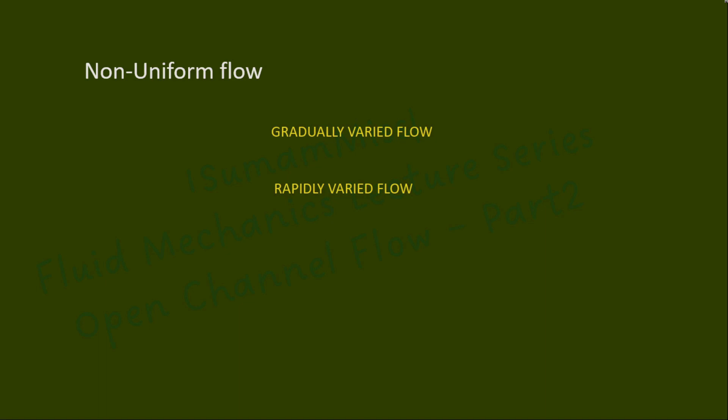Today we are continuing the discussion on non-uniform flow. Non-uniform flow is classified into gradually varied flow and rapidly varied flow. In gradually varied flow, flow characteristics, that is flow depth and velocity, change gradually over a long distance. In rapidly varied flow, these flow characteristics, that is flow depth and velocity, change suddenly over a short stretch of the channel. One example of rapidly varied flow is the hydraulic jump.

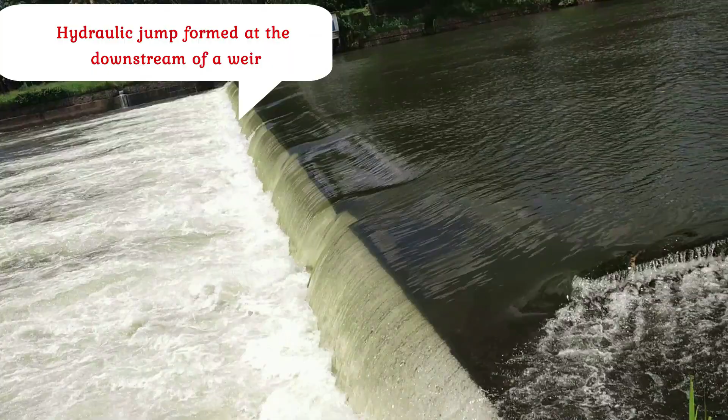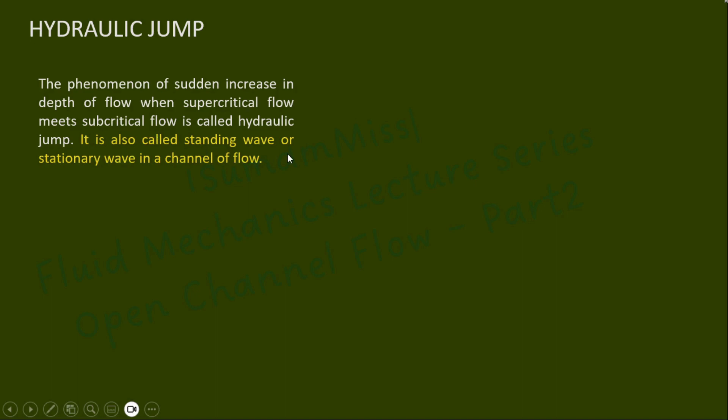The phenomenon of sudden increase in the depth of the flow due to the transition of the flow from supercritical to subcritical is called hydraulic jump. It is also called a standing wave or stationary wave in a channel flow. The hydraulic jump is formed at a section where a low depth stream of high velocity strikes sufficient depth of liquid flowing with low velocity. So the incoming flow is in supercritical state, whereas it strikes the subcritical state of flow, and the hydraulic jump forms at this meeting point.

When the hydraulic jump occurs in a flow, the depth of flow increases suddenly and the flow experiences a considerable energy loss due to eddy formation and turbulence. Since the depth of flow in a hydraulic jump suddenly changes, the phenomenon can be categorized as rapidly varied non-uniform flow. Since the non-uniformity is limited to a short distance, the hydraulic jump represents a local phenomenon.

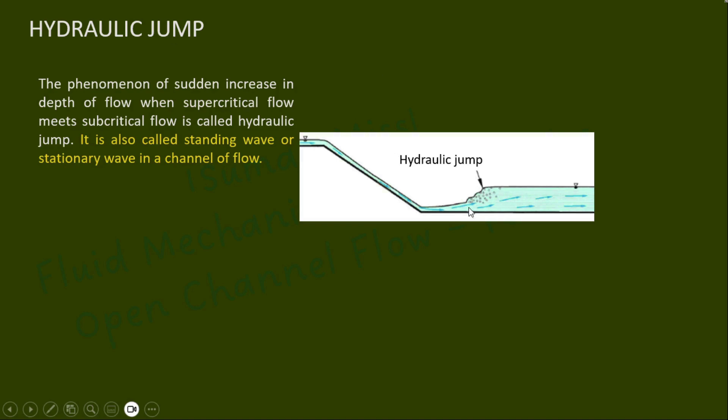The hydraulic jump also forms when the liquid flows out from a spillway. In this case, the idea of creating the jump is to dissipate the large amount of energy that is carried by this water. Otherwise, it will scour the entire downstream structure. Another situation where the hydraulic jump occurs is downstream of the sluice, from which water comes out with a depth less than the critical depth.

This dotted line represents the critical depth line, and the flow depth of this incoming flow is less than the critical depth. That means the flow here is in supercritical stage and it meets the subcritical flow at the downstream side, and the hydraulic jump is formed at this location. So the apparent effect of hydraulic jump is the increasing water level.

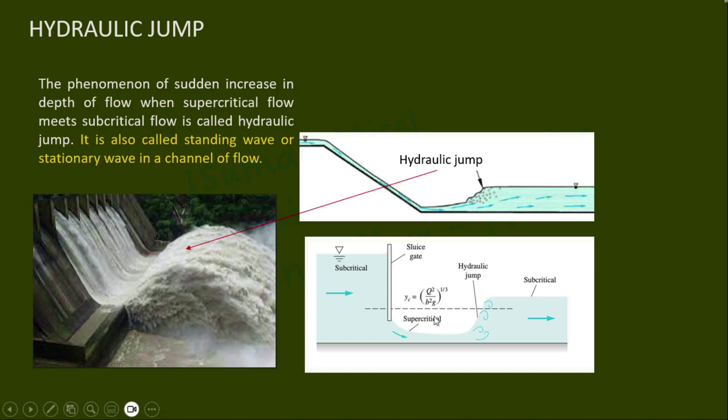Now let us discuss the energy loss associated with the formation of the hydraulic jump. Consider the formation of the hydraulic jump in a prismatic channel with a horizontal bed. When the hydraulic jump occurs in a channel, the flow depth increases suddenly and the flow experiences considerable energy loss with eddy formation and turbulence. Y1 and V1 are the flow depth and velocity just before the jump, and Y2 and V2 are the flow depth and velocity after the jump.

If we draw a specific energy curve, the minimum point corresponds to the critical depth Yc. Y1 is the flow depth before the jump and the corresponding specific energy is equal to E1, and Y2 is the flow depth after the hydraulic jump and the corresponding specific energy is equal to E2. So you can see that E2 is less than E1, and delta E is equal to E1 minus E2. Because of this energy loss, the depth after the jump is less than the alternate depth corresponding to the specific energy at section 1.

Because of this unaccountable energy loss, one cannot use the energy concept for the analysis of rapidly varied flow. We have learned previously that in a rapidly varied flow, we have to use the specific force curve with the concept that the specific force at section 1 equals the specific force at section 2, that is equal to F. If we draw the vertical at F, it will cut two points on the specific force curve corresponding to the flow depths Y1 and Y2. These Y1 and Y2 are the flow depths before and after the jump. These two depths are called sequent or conjugate depths.

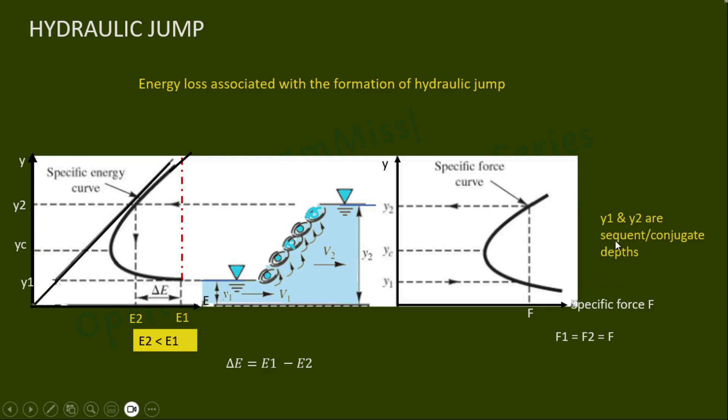Now we can derive the expression for the sequent depth in a hydraulic jump in a horizontal rectangular channel. Consider a hydraulic jump that forms in a prismatic channel of width B with a horizontal floor carrying a discharge Q. Based on the momentum concept, we can say the specific force at section 1, that is F1, is equal to the specific force at section 2, that is F1 equals F2. So what is specific force F1?

F1 equal to Q square by gA1 plus A1 Z1 bar, and F2 that is equal to Q square by gA2 plus A2 Z2 bar. So here A1 is equal to B into Y1 and A2 is equal to B into Y2, and Z1 bar is the distance of the point of application of this pressure force with respect to the free surface, and Z2 bar is the distance from the free surface to the point of application of the pressure force P2. So Z1 bar equal to Y1 by 2 and Z2 bar equal to Y2 by 2.

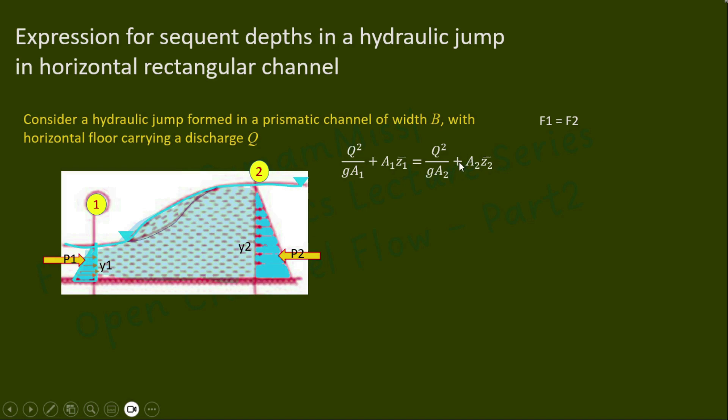So if you are substituting for A1 and A2 and Z1 bar and Z2 bar, then we can modify this equation as Q square by g into BY1 plus BY1 into Y1 by 2 equal to Q square by g into BY2 plus BY2 into Y2 by 2. So if you are dividing LHS and RHS by B, then this equation becomes Q square by gB square into 1 by Y1 minus 1 by Y2 equal to half into Y2 square minus Y1 square.

So Y2 square minus Y1 square can be simplified into Y2 minus Y1 into Y2 plus Y1. Q by B can be written as small q. So if you are replacing Q square by B square as q square, now this equation can be written as q square by g into Y2 minus Y1 divided by Y2 Y1 equal to half into Y2 minus Y1 into Y2 plus Y1. So we can eliminate the common terms from LHS and RHS. This term and this term can be cancelled.

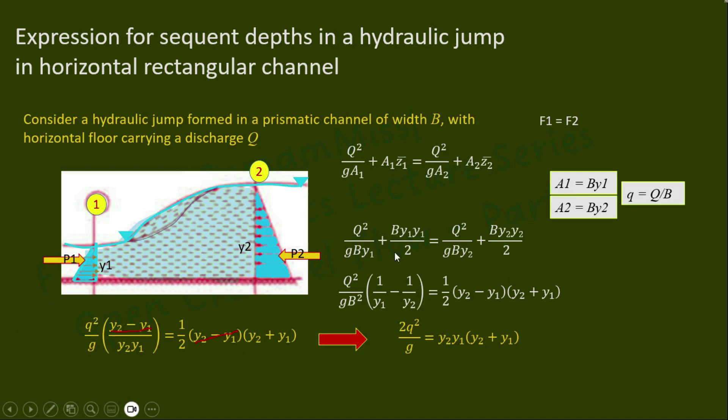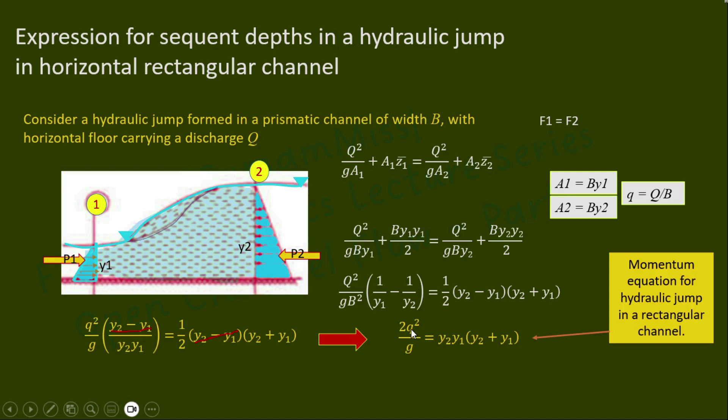Then we can simplify. So it can be written as 2q square by g equal to Y2 Y1 into Y2 plus Y1. So Y1 and Y2 are the sequent depths and q is the discharge per unit width. So this equation represents the momentum equation for a hydraulic jump in a rectangular channel. Now we can discuss different types of equations connecting Y2, Y1 and q. So if you are expanding this equation, it becomes a quadratic equation, which can be expressed for either Y2 or Y1.

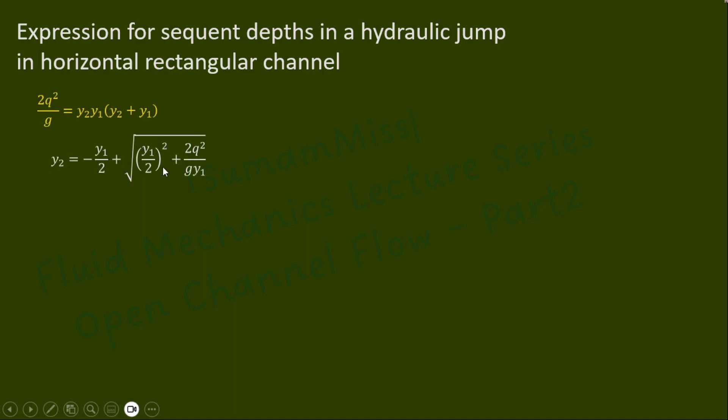So if you are expanding this equation, Y2 can be written as minus Y1 by 2 plus root of Y1 by 2 the whole square plus 2q square by gY1, or Y1 can be written as Y1 equal to minus Y2 by 2 plus root of Y2 by 2 the whole square plus 2q square by gY2. That means if you know any of the sequent depths and the discharge, then the other depth can be determined.

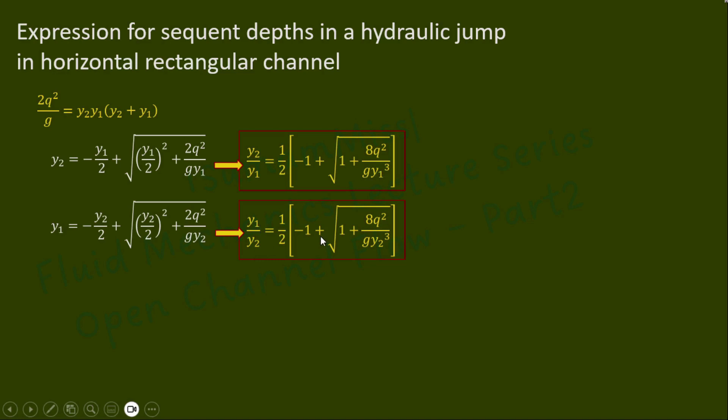This equation can also be modified as Y2 by Y1 equal to half into minus 1 plus root of 1 plus 8q square by gY1 cube, and Y1 by Y2 equal to half into minus 1 plus root of 1 plus 8q square by gY2 cube. But what is q square by g? q square by g equal to Yc cube. So in this portion, q square by g is replaced by Yc cube. So this equation becomes Y2 by Y1 equal to half into minus 1 plus root of 1 plus 8 Yc cube by Y1 cube. Similarly, we can write this expression also.

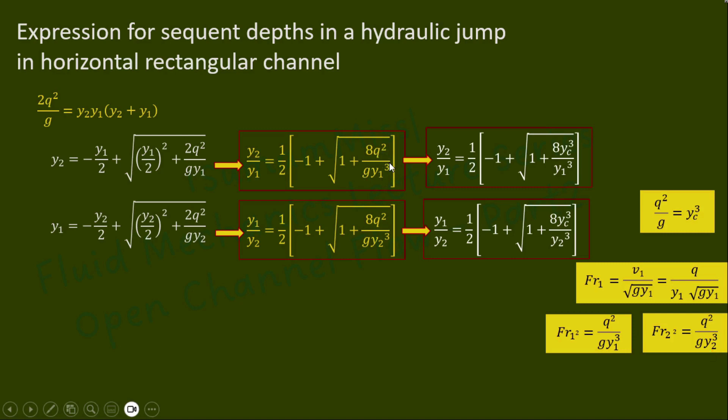This equation also can be represented in terms of Froude number. So Froude number at section 1 equal to V1 by root of gY1. So V1 equal to q by Y1, where q is the discharge per unit width, or Fr1 square can be written as q square by gY1 cube, and Fr2 square can be written as q square by gY2 cube. So this term, q square by gY1 cube, can be represented by Fr1 square. Similarly, q square by gY2 cube can be represented by the Froude number square at section 2.

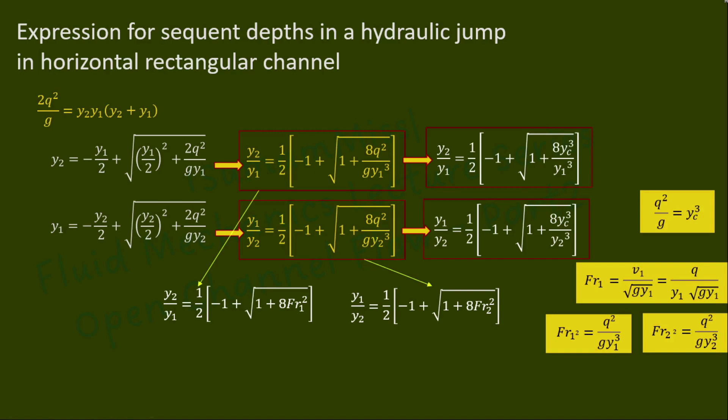So this equation now can be written as Y2 by Y1 equal to half into minus 1 plus root of 1 plus 8 Fr1 square, where Fr1 is the Froude number before the jump. And this equation can be written as Y1 by Y2 equal to half into minus 1 plus root of 1 plus 8 Fr2 square, where Fr2 is the Froude number after the jump. So these are the different forms of the equations which connect Yc, Froude number, sequent depths and discharge.

Now, today's session comes to an end. We had enough discussion about rapidly varied flow and how the momentum concept can be used to derive the dynamic equation of a hydraulic jump in a rectangular channel. We have also established different types of relationships connecting sequent depths and discharge. So for the time being, it is enough.